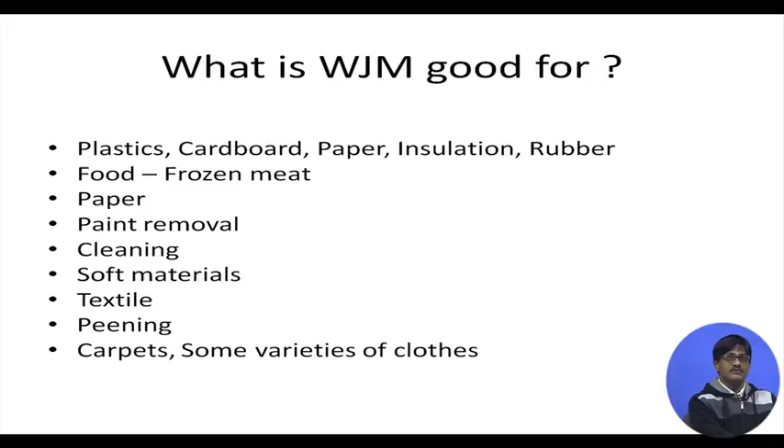Suitable materials include plastics, cardboard, soft materials, paper, insulation, rubber, food. In case of food like frozen meat, leather, etc., there is no risk of contamination due to abrasives being present, so water jet machining is extremely suitable for these. Also paper, paint removal, cleaning, soft materials, textile, peening (a sort of hardening), carpets, some varieties of cloth, etc. In all these cases water jet machining is quite suitable.

What is abrasive water jet machining good for? We have already discussed some materials. Let us see additions we had not mentioned before, like glass, ceramics, composites, semiconductors, polymers, metal matrix composites, ceramic matrix composites, titanium and titanium alloys, nickel and nickel alloys, brass, aluminum, steel - almost every metal, wood, stone, granite, rocks.

This is one area in which it excels over other methods like EDM, ECM, etc. - concrete, glass, fiber, metal laminates, turning, drilling, pocket milling, etc.

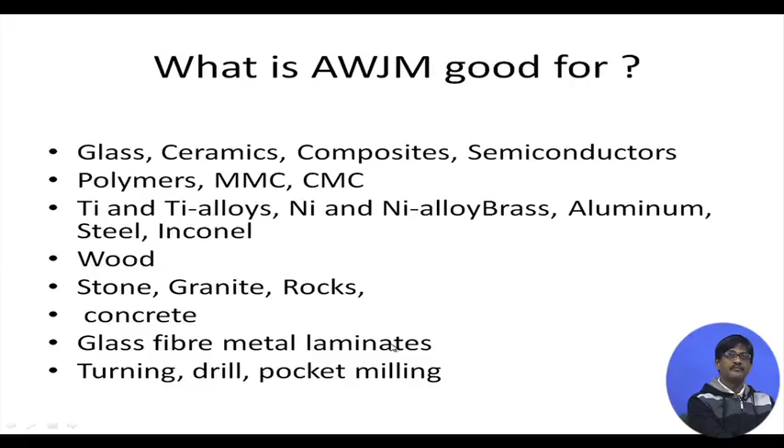What kind of abrasives are used? Do we use silicon carbide, aluminum oxide? Generally not. We use garnet, which is generally a gemstone, and there can be different compositions of garnets. We are not putting in any specific composition here, and typically red garnets are used. Why is this garnet used?

First of all, it is available in abundance. It can be found in mines, in sediment, in alluvial deposits, but from the mines, the ones available can be very sharp and hard, etc., and therefore they are an obvious choice. If you ask me the reason it is chosen: it is hard, it has sharp edges, it is available in abundance, and it is relatively chemically inert.

There are some alternative abrasives like olivine for aluminum. Its advantage is that if you are not cutting a very hard, tough material - say you are cutting aluminum - you can use olivine, which is not as hard or sharp as garnet, and it will be easy on your equipment, meaning it won't wear down as much as with garnets. Generally it's from 125 mesh size to 60 mesh size. Dry ice could be a good candidate because it disappears after use, causing less environmental pollution and contamination.

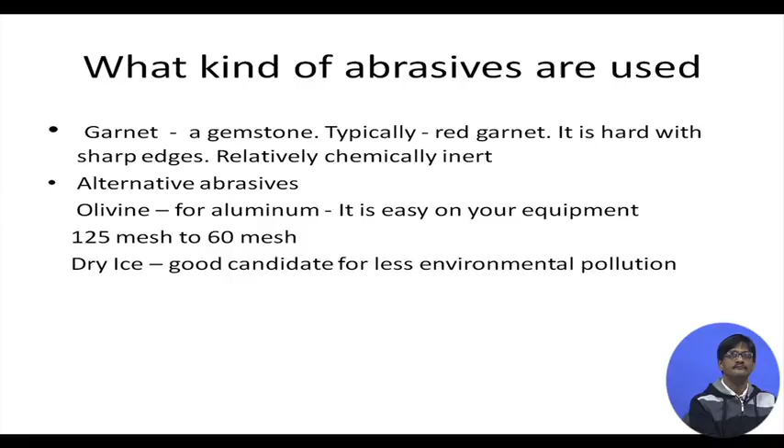Some data and finer points that we might have missed: what's the pressure range? We have done so many problems with 4000 bar. Generally the pressure range is 2500 to 4000 bar, give or take a few hundred bars. That generally defines the velocity range you will achieve, because as we know V squared equals 2P by rho. So if pressure is fixed, and you are considering water, the initial velocity of water is fixed by the pressure, so you can immediately determine the velocity range.

Abrasive flow rate can be as low as 0.1 kg per minute and as high as 1 kg per minute. In the numerical problems we have solved, you might find references to abrasive flow rates of 0.6, 0.8, etc., and in some cases we might have crossed it. For the sake of mathematical problems formulated on some basic principles, we might go slightly away from it, but it doesn't really matter for mathematical problems. Generally, when working for practical cases, we try to stay within this limit.

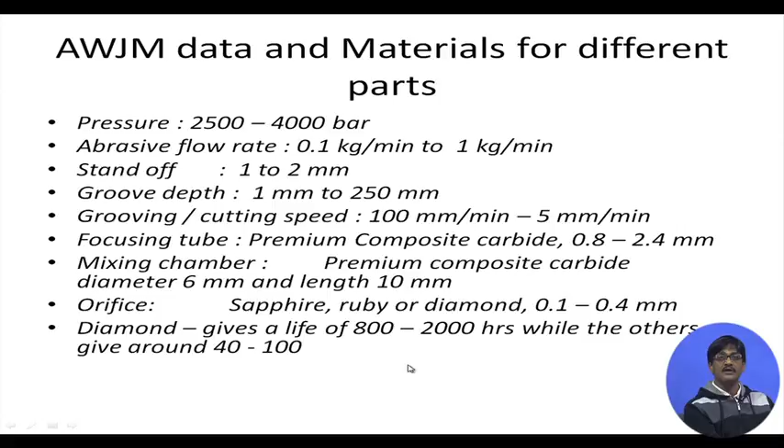And as you can well understand, it's going to be quite costly from the maintenance side, because many parts are going to wear off after several hours of use and have to be replaced.

How do we get rid of the abrasives? Because so much abrasive comes out with such high velocity, if it is open to the atmosphere, we will definitely have environmental pollution and contamination problems. So generally it might be put into water - the easiest way is to have a water basin into which the abrasives will be put, and once trapped inside water, it cannot go out into the open atmosphere.

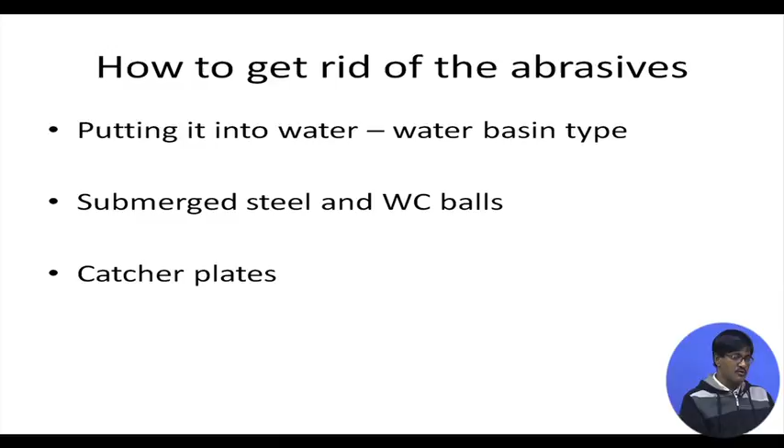Or there might be some submerged steel and tungsten carbide balls, and it gets trapped in between these and cannot escape. Or we might have catcher plates angled so that once the abrasives come inside, they get reflected multiple times and ultimately cannot escape outside. So it is a very important point to take care that the abrasives do not get exposed into the outer environment.

All the abrasive water jet machines we have been referring to during our analysis and mathematical problems are of a particular type called entrained abrasive jet machines. This means that when water comes out through the orifice and enters the mixing chamber, ultimately going out through the focusing tube into the atmosphere, inside the mixing chamber we produce a sort of vacuum due to its sudden flare in diameter, and into this vacuum the abrasives get sucked in and entrained into the jet. Some air also gets entrained, but this is the way it's done.

Now, obviously, this has its advantages and also its problems. Determining the amount of consumption of abrasives is very easy in this case, but the problem is that it's not possible to completely stop the entrainment of air. The more air entrained, the less the efficiency of the machine. But it is possible to have equipment in which entrainment of air can be completely avoided - this is the suspended type, abrasive suspension jet, sometimes referred to as ASJ.

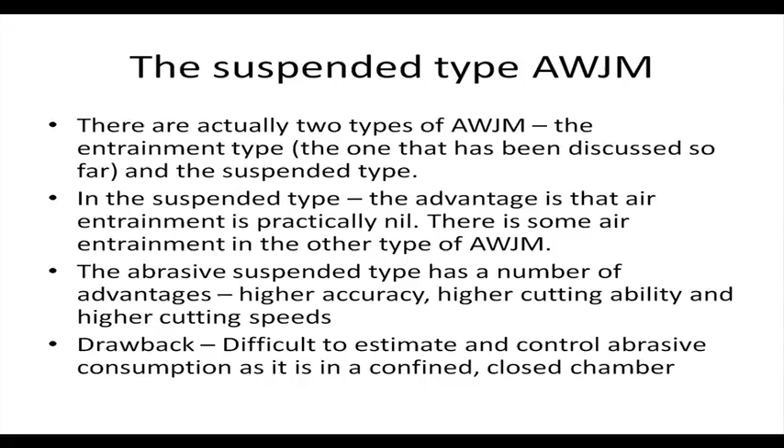So in this case what do we have? High pressure water is still used here, and we have a pressure vessel, there is an isolator, and here is the suspension of abrasives in water, and it has an outlet through which ultimately it is led to the machining zone.

So when this suspension is gradually getting depleted, it starts from here when it is full and it is gradually getting depleted. It is sometimes difficult to estimate when a replacement is required.

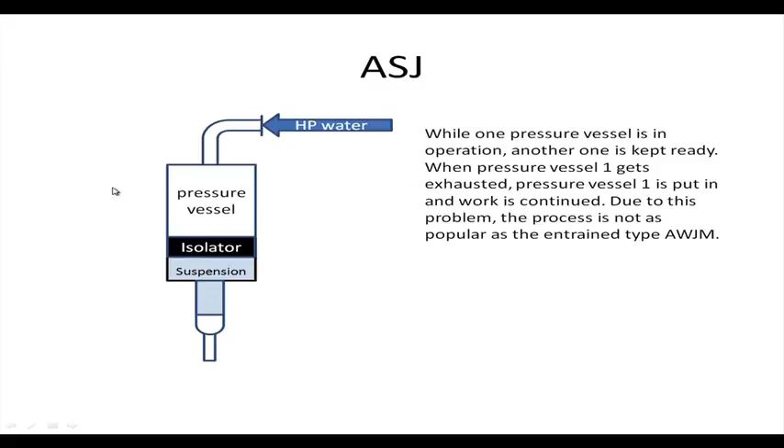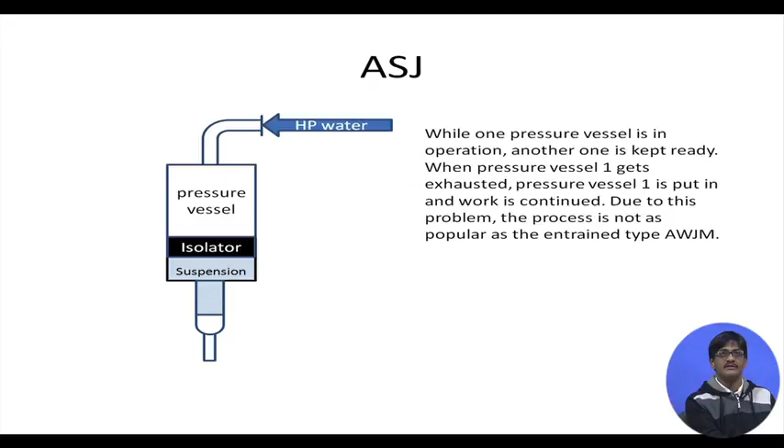So generally we have a 2 vessel system. There will be in parallel yet another vessel which is full. The moment this is emptied up, we have the provision of machining, abrasives getting sucked in from the second pressure vessel, and this is removed and replaced by a fresh one. So this way, by alternatively taking the abrasive slurry from this vessel and the second vessel, the system can be continued without any pause. But this is not as popular as the previous one that we have discussed, which is entrainment.

So before completing this course, we should definitely look at the plus points and the drawbacks of the system. Plus points: as we have discussed before, abrasive water jet machines can cut virtually any material like pre-hardened steel, mild steel, copper, etc. It can cut thin material, it can cut thick material, and it can make all sorts of shapes only with one tool.

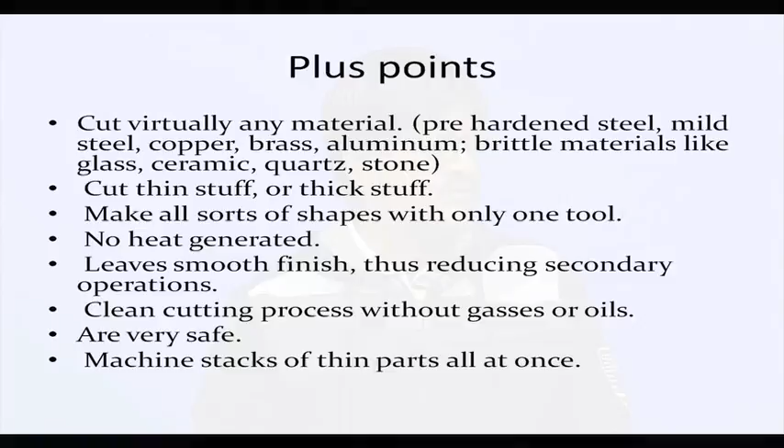There is no heat generated and it leaves a smooth finish, and sometimes secondary operations might not be required at all. And it is a clean cutting process without gases, oil, dust free. Debris of the cutting process is minimal, it is quite safe, and last of all, it can machine stacks of thin parts all at the same time, and if some material is non-homogeneous, it will not cause a problem.

It might cause a problem when, say, thermal properties of a body are varying drastically from one point to the other. It might cause a problem in case of laser beam machining, but any properties, even if they be different in this case, do not pose that much of a problem in case of abrasive water jet cutting.

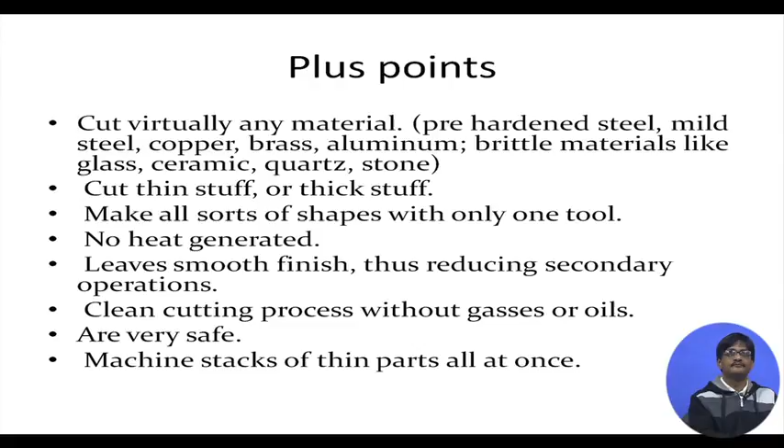Let us look at some of the drawbacks, because there must be some drawbacks. Otherwise abrasive water jet cutting would have replaced laser beam cutting, wire electrical discharge machining, gas cutting where you use excess of oxygen with acetylene to burn and remove material, plasma cutting, hacksaw, power saw, band saw, and all sorts of slitting saws. Every cutting operation would have been replaced by water jet cutting because of its obvious advantages, but it is not so.

Do you see an abrasive water jet machine in just every shop that you have visited, perhaps for your industrial training, for industrial visits, and if you are associated with some mechanical workshop? Do you see abrasive water jet machine? It is extremely rare. So there must be some drawbacks.

The drawback is that a limited number of materials can be cut economically. Costs are high. Rather, we will say that for a limited number of materials, costs are low, and generally costs are high. Cutting rate is greatly reduced for materials like tool steels, that means hard, tough materials. Immediately you will find, yes, you can cut it, but at a very slow rate.

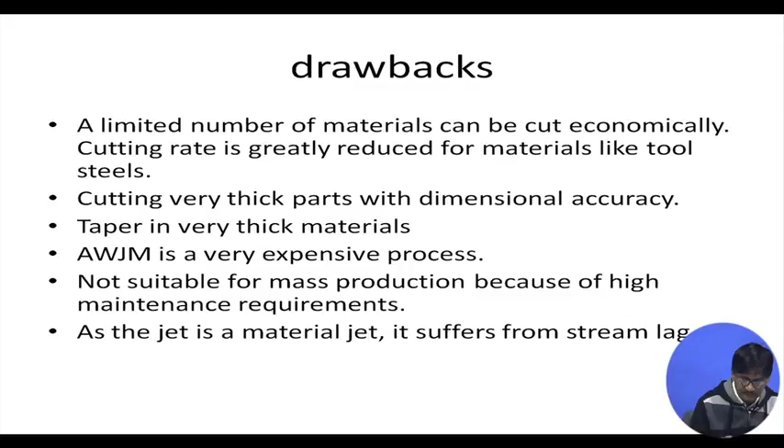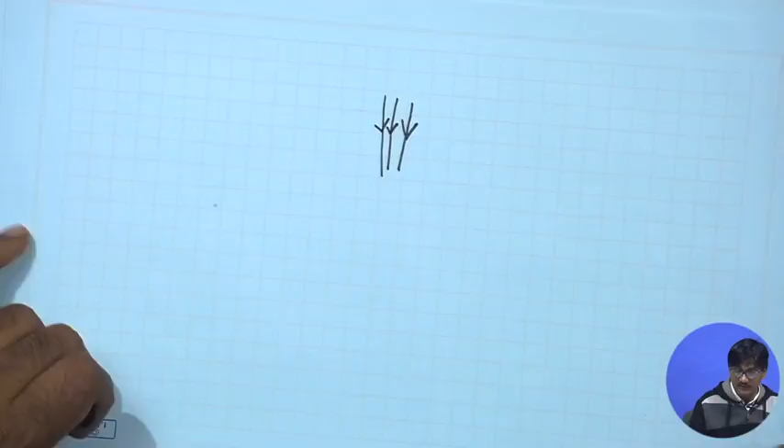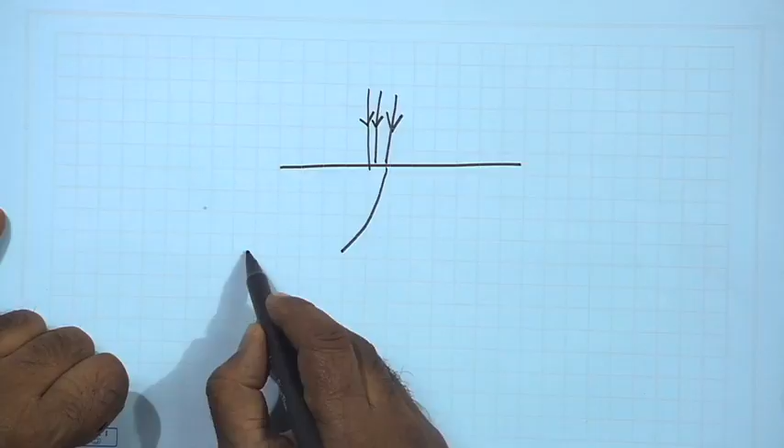Let us say these are some of the abrasive jets which are coming in. It is cutting this material, this part has already been cut, and this is the particular pathway of these abrasives.

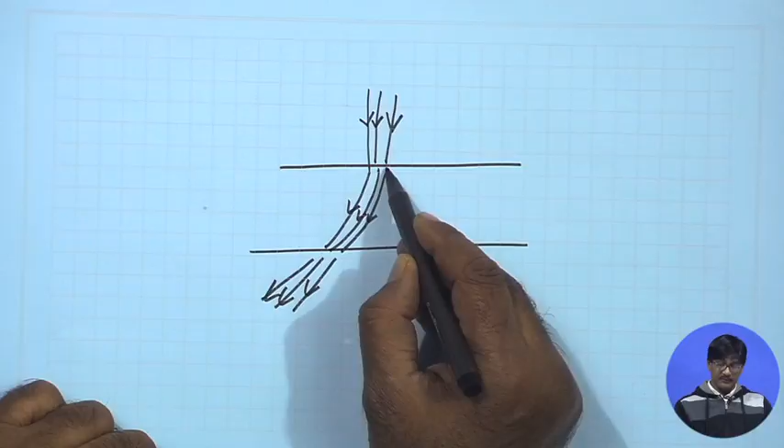Now, this is a problem, because when you are cutting, the operator or the machinist expects that the material has been cut up till this point, but this material is uncut. What problem does it create? Whenever you are cutting, say a corner, say this is one part and you intend to cut like this,

you will have a big problem when you are turning. So, you are cutting this way, you are moving this way, etc. You are thinking that you have cut up to this corner when the cutter reaches like this, but actually it has left behind this particular uncut material. Maybe on the bottom it has cut only up till this point, while you have reached up till this point.

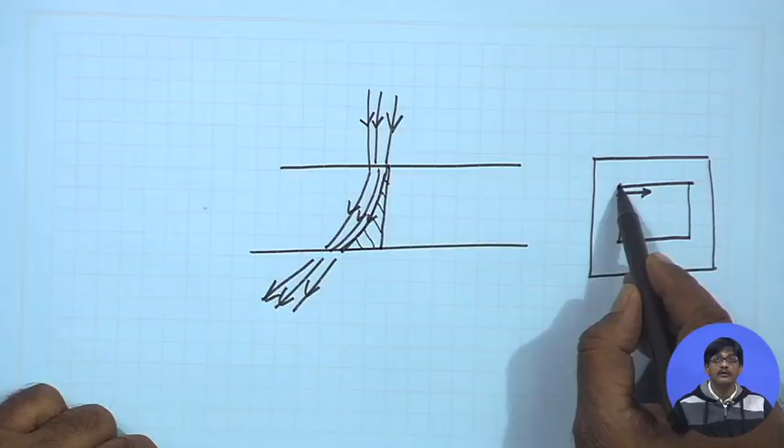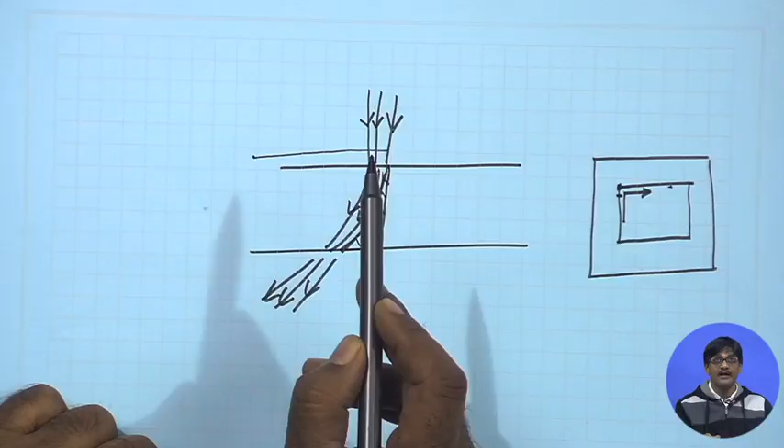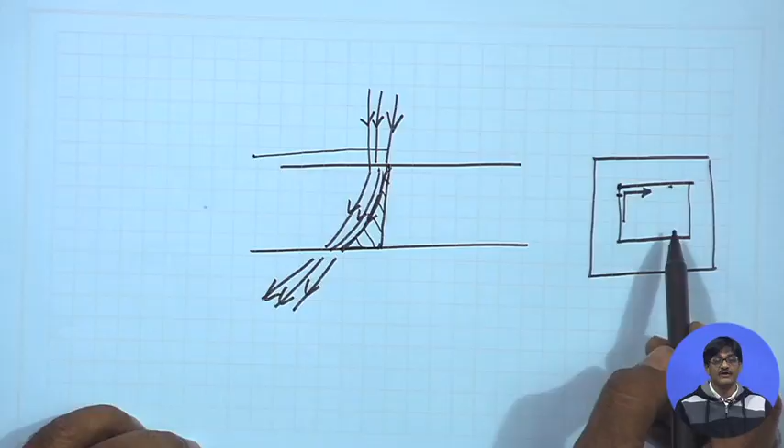That is a problem, because at this point you are going to take a turn, and immediately this part is going to remain uncut. So, the cutting jet, the water jet is proceeding this way, and then say it takes a turn and starts moving up, takes a right angle turn. So, it is moving this way, and every time it takes a turn, it will be leaving behind this material uncut. So, stream lag is unavoidable, and it creates geometrical defects in the workpiece, and we have to have some method by which we can remove it. So, this is listed as one of the drawbacks.

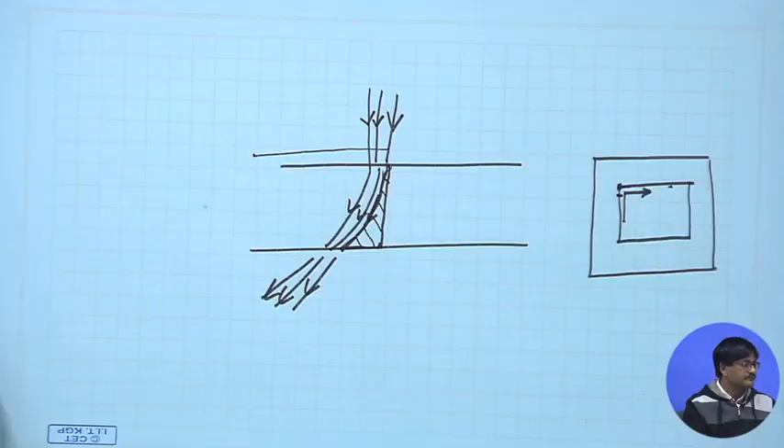A quick look at a comparative study of abrasive water jet machines and laser beam machining. Abrasive water jet machines can machine reflective materials. This is a very strong point in support of abrasive water jet machines, while lasers do have an issue in these cases. For example, if you have a very shiny surface of say aluminum, silver, or some such material which is very polished and has high reflectance. If you have metals and a carbon dioxide laser at 10.6 microns wavelength, you will find most of it is getting reflected.

How much is reflected? Say if I say more than 90%, would you be very much surprised? It can be as high as 95 to 96% also in some cases. So, even if you have a laser with kilowatts of power, would it make any difference if half of it is reflected? So, lasers have an issue with materials which are highly reflective or polished to a level so that most of the power is getting reflected. Lasers might be rendered ineffective, but this is not the case with abrasive water jet machines. They can machine reflective materials.

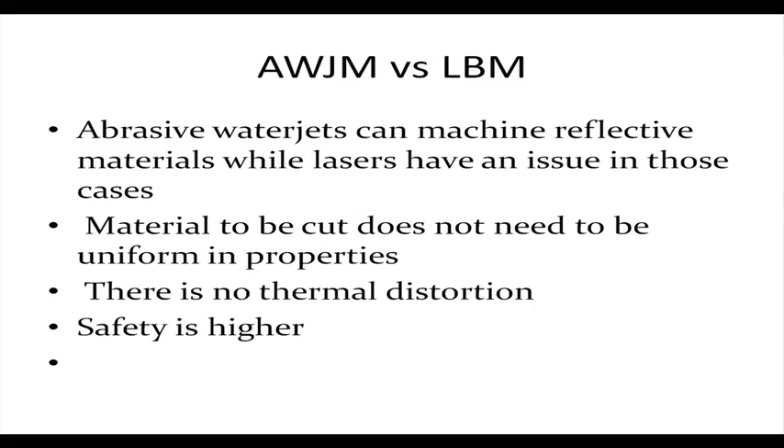Now, a look at abrasive water jet machines and electrical discharge machining. Water jets can act faster. In what way? Suppose you are cutting using abrasive water jet machines and using wire electrical discharge machines. What's the problem with wire cut electrical discharge machines? The problem is essentially you have to carry the current through the wire, and the wire, as we know, has a diameter of about 250 microns, and 250 microns thickness wire can hardly carry the current that you would have liked it to carry, and therefore cutting speeds are generally restricted by this.

But with an abrasive water jet cutter, you can well reach speeds of 5 meters per minute, which is considerably higher than what you can reach with wire electrical discharge machines. So, you might say, I will supply as much current as would be required for that sort of speed, but you are restricted by the wire.

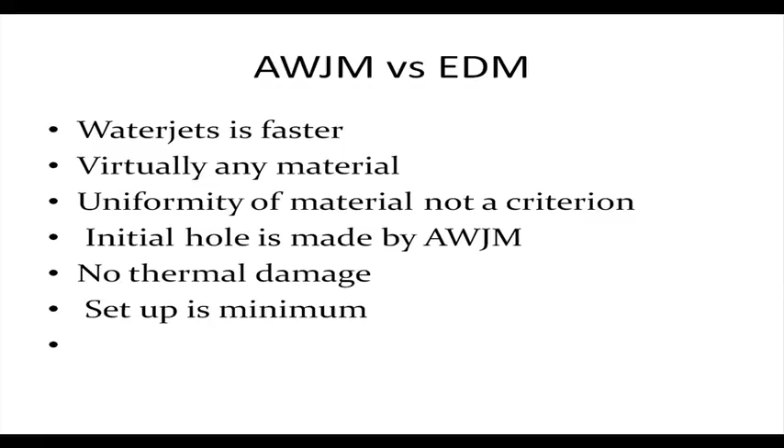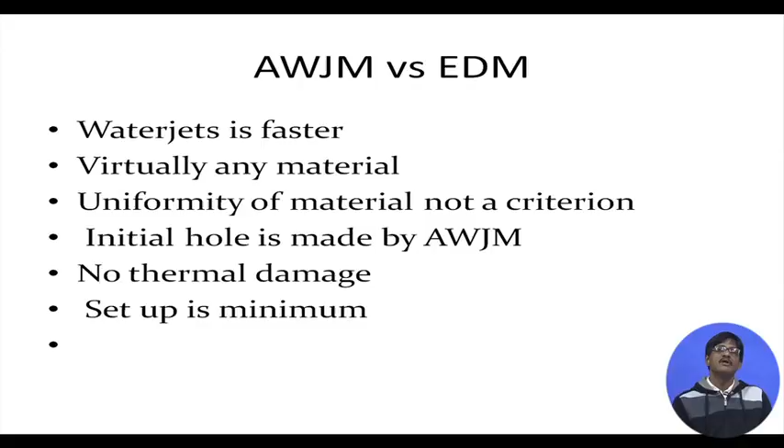Wire will be having a maximum capacity to carry current, and that restricts it. Abrasive water jet machines are not restricted by any requirement of electrical conductivity of the material, and therefore virtually any material can be cut. Uniformity, these points are already known to us. Initial hole is made by abrasive water jet machines itself, while an initial hole might have to be made in case of wire electrical discharge machining. No thermal damage, and setup is also minimum.

To end it, just like I am giving you take home problems, take home assignments - this is one take home assignment, and if you want you can answer it. If you do not want, you need not answer it. It is just for those students who feel interested to proceed a bit more. All take home assignments are going to have a different flavor, not the run of the mill problems.

So what do we have here? You have to write 'Made in India' inside a metallic tube by grooving, and these grooves have to have constant depth, and you select an abrasive water jet machine for the purpose. The velocity of grooving is obtained by the computer controlled uniform circular motion of the tube, whose diameter is 30 millimeters, and uniform linear motion of the abrasive water jet nozzle as shown.

So let us see what is shown. This is the tube, this is the end, and inside you are going to write 'Made in India'. So if you want to write that, this is your nozzle, which has a squarely bent neck, and this is the jet coming out. The motions provided here to write all the letters are: straight line axial motion of the abrasive water jet nozzle, and circular motion of this tube.

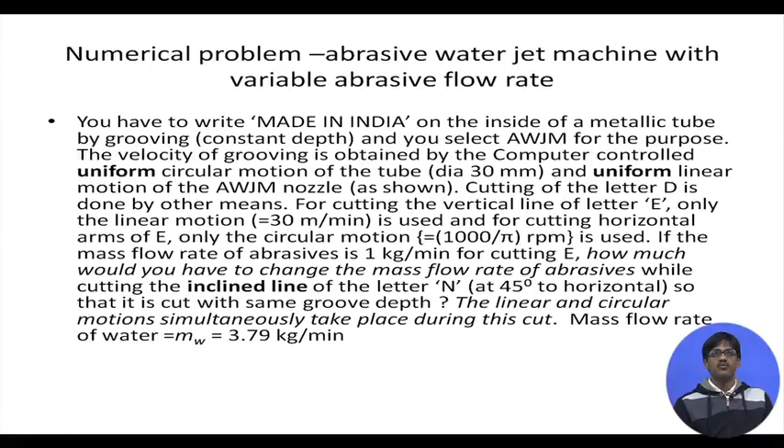If the mass flow rate of the abrasives is 1 kg per minute for cutting E, how much would you have to change the mass flow rate of abrasives while cutting the inclined line of the letter N at 45 degrees to horizontal, so that it is cut with the same groove depth? The linear and circular motions simultaneously take place during this cut, and the mass flow rate of water is 3.79 kgs per minute. Let's see.

So now this makes more sense. This is going to move this way at 30 meters per minute. This has 30 millimeters diameter, and this rotates at 1000 by pi RPM. And in case of the writing of this inclined line of N, both these motions will be taking place together, and at that time obviously the speed of grooving will be increasing, because these two things have to take place simultaneously.

So if speed of grooving increases, and if the abrasive flow rate is kept constant, you will have a problem, because in that case the groove depth will reduce. So what should be the increase in abrasive flow rate, so that this groove depth will be maintained? Try to solve the problem yourselves. I will disclose the correct answer after the last date of submission of this assignment. This assignment is not compulsory.